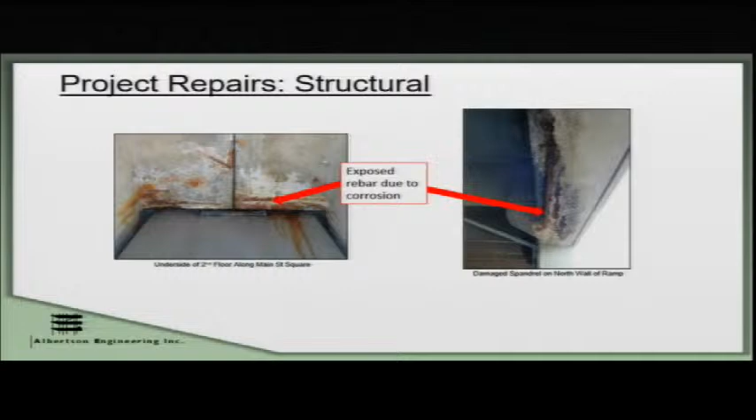The right-hand picture is an image taken, again, below the second floor along the north ramp line, where we have a precast edge element that has experienced more significant deterioration where moisture has penetrated into that concrete, has corroded that internal reinforcement, caused it to expand, and is now beginning to spall or explode that cover concrete away, revealing the reinforcement.

If you've ever been in the garage and you've heard a car driving and you hear a loud kerchunk, what you are hearing is them driving over what's shown on the left-hand side, which we're calling sandwich plate joints, where during original construction, the double T's were not fabricated quite correctly. There were supposed to be connectors along their joint lines that were meant to mitigate their flange tips from moving relative to one another as a car drove over them. Those connectors were not installed appropriately.

As a previous repair, these sandwich plates were meant to be installed top and bottom to mitigate that movement. They're not doing any of that. They're along for the ride. And so that noise is actually those plates being bounced as a vehicle drives. That large differential movement between the flanges is actually tearing up that joint sealant, and as you can see in that picture, we actually have on all of these joints extensive moisture infiltration to the underside of the deck and the double T's where we don't want the moisture to be.

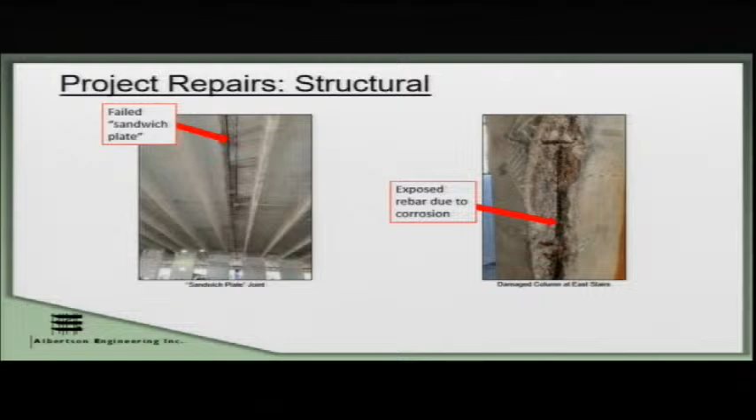The final structural picture, this is actually a column located at the southeast stairs right by the garbage compactor. Again, this is a vertical element that has significant cracking and spalling issues throughout its entire height from second floor down to ground, again, due to moisture infiltration and the resulting corrosion and deterioration from that.

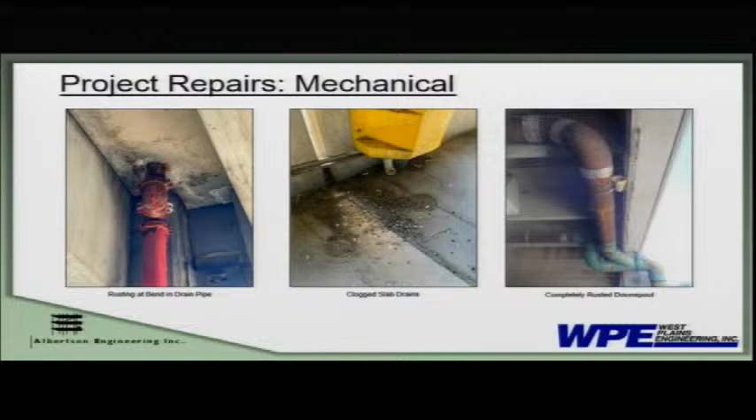As we jump over to mechanical issues, the left and right pictures both show deteriorated vertical drain piping. The entirety of the vertical drain piping and the existing floor drains are to be replaced. Actually, the center picture shows a couple floor drains that weren't sized appropriately in a previous project, and they're now completely clogged. In addition, along the second floor south line on the Main Street Square side, we're adding, I believe, an additional 10 floor drains to help mitigate some of that ponding that happens on a regular basis in the low spots of the deck.

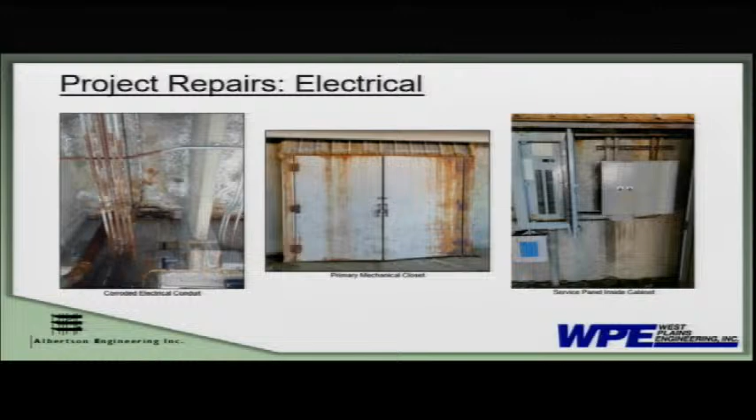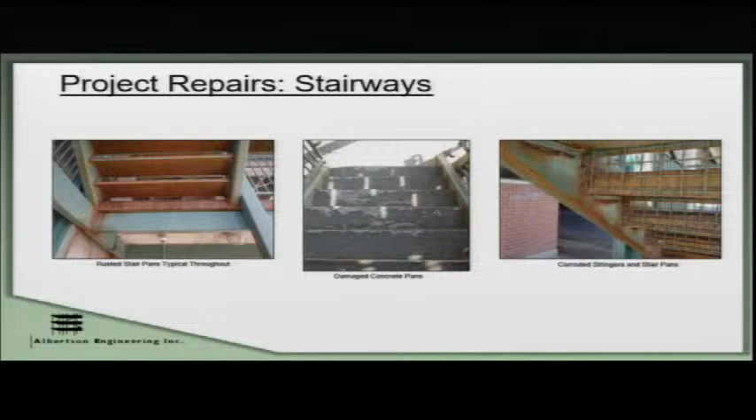I don't want to spend a lot of time on the stairs, these next two slides, because you all walk these probably every day. These stairs have a variety of corrosion deterioration issues, from general surface corrosion, rust pitting, where moisture actually gets behind the paint and the paint actually holds the moisture up to the steel, causing more localized extensive damage than if it were just bare steel open to the air. The stair treads themselves that are concrete are in poor shape. That's a safe word to use. They have very uneven, unequal walking surfaces.

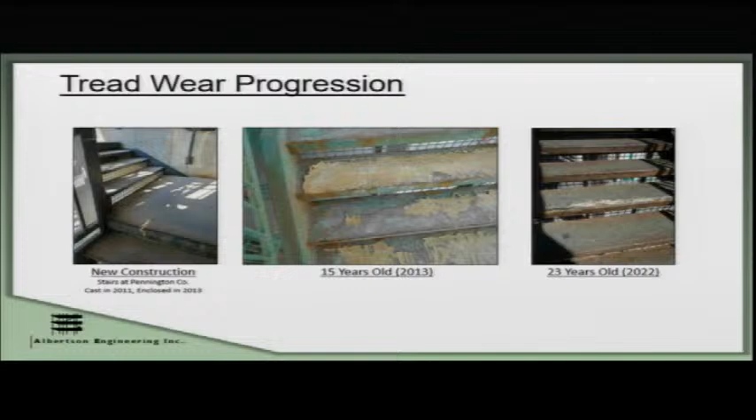So in addition to the renovation items that we already highlighted, we are also proposing that the southwest and southeast stairways be enclosed. The primary reasons for this is we want to mitigate that potential for slips, trips, and falls, and to mitigate that potential for snow and ice buildup on the stairs. It is going to provide better protection not just for the users that have to navigate the stairs on a regular basis, but also for the structure itself.

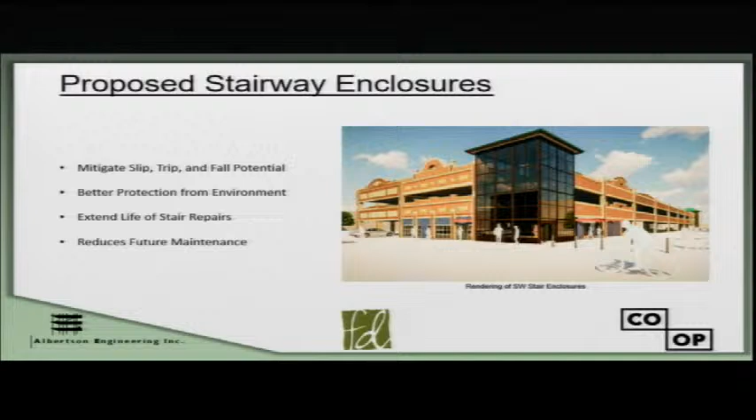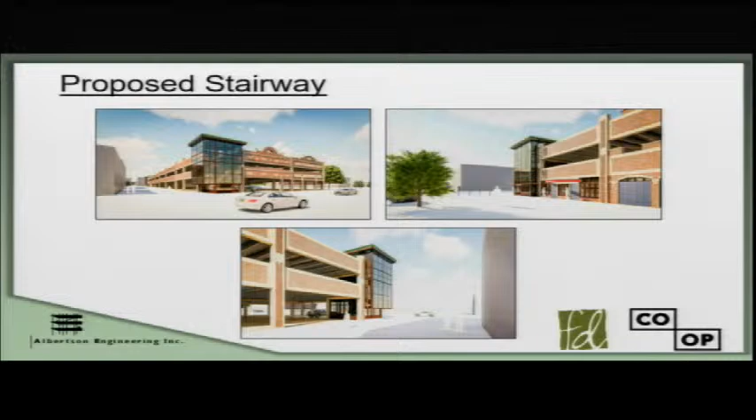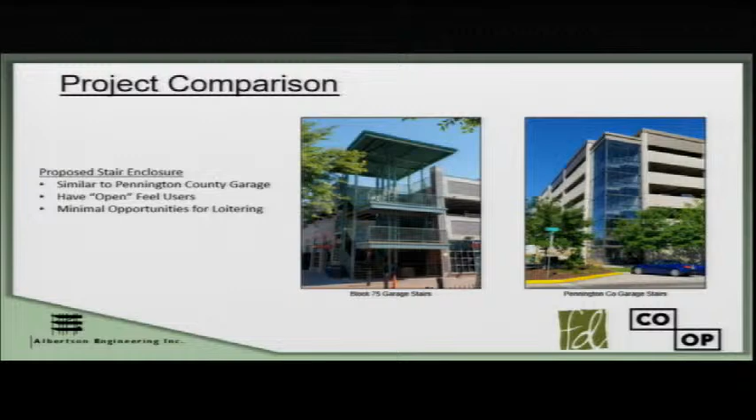For those of you who use the garage at night, here's a comparison of what we're looking to achieve as part of this future project. We will be renovating the lights in the Block 75 garage to go to whiter, brighter LED fixtures. And as you can see, the Pennington County garage stair feels very open even at night. If you do happen to go over there, there's very few places someone could loiter or hide in that stair that you wouldn't be able to visually see as someone walking up or approaching the garage.

So this project is an extensive top-down maintenance renovation project of the entire garage. And it's of such extent and size that there is no way that a contractor is effectively going to be able to tackle it all at once in a short period of time. In our construction documents, we have provided phasing, and we've tried to chunk out the work in manageable enough pieces for the contractor to address in a timely fashion. In our drawings, phase one, and I say phase one simply because we wanted to get that up front and center before the contractors, is going to be the phase that the garage will need to be shut down. At this point, we have proposed for it to be shut down for 8 weeks.

With the proposed schedule shift, it is likely that this will not be the first phase that they do. If it were me and I got the project, I would probably start that shutdown somewhere between March and April. But the primary reason we are shutting down the garage is there's some extensive concrete work that has to be done up on 3rd floor that actually requires shoring on both the ramp side and the south side all the way down to ground level. And the contractor is going to tear relatively large holes into the concrete deck, about 20 feet long, 8 feet wide in 2 spots, so unless you feel like trying to jump a big hole with your car, to better manage that safety, we are recommending that the garage be entirely shut down.

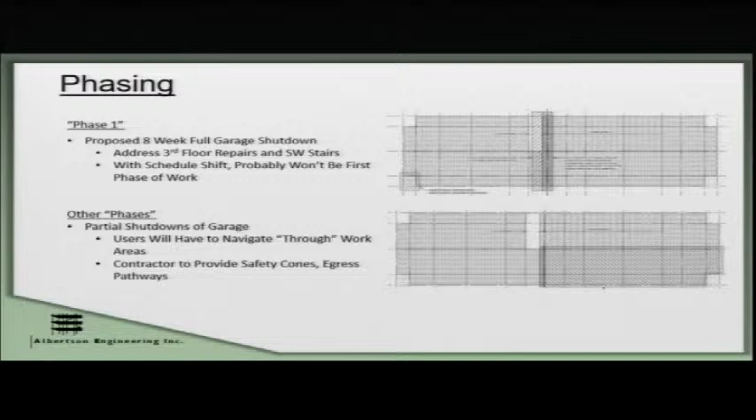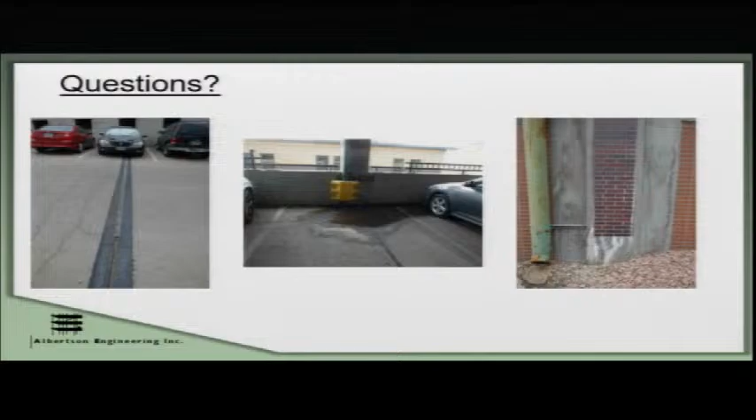I know that was a lot of information, and I believe, as Rod said, this is being recorded, so if you have questions, feel free to ask them, either of me or the city representatives that are here.

Thank you, Stefan. Again, my name is Vicki Fisher. I'm the Director of Community Development. I think that it was important for us to see the state of the current structure and knowing that we need to make repairs because this structure is important to us as a community.

We recognize that as someone who has a business or someone who lives in this area, someone who has customers, this parking structure is essential for us to all be successful. We want to partner with you. We want to make sure that any inconvenience you feel is mitigated to the greatest degree possible.

And so knowing the scope of the work that needs to be done, it helped me when Rod came to me to say, okay, this is what we need and this is the length of time. Having this additional information was very important. One of the things that Stefan pointed out too is showing the life of the stairwells. When it was originally built, when it was improved in 2013, and then the deteriorated state that it is today.

Similar to the enclosure on the stairwells, a huge dollar price on these repairs is providing a sealant. And again, not being in the construction world, the best way that they could explain it to me is, for those of us who are homeowners, you go out and you stain your deck. If you don't put a sealant on it, you're just restaining it and restaining it. But with a sealant, you get a little more life behind that. And so this sealant will hopefully minimize future repairs and extend the length of time before we would be faced with having to do such a major renovation again.

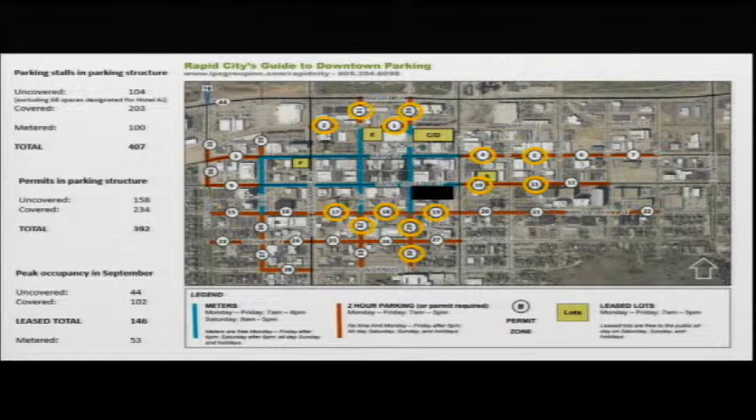So if there are not, am I going to be down on that furthest southern one and having to walk all that way? I have to park there, I have to walk all that way, but then I get a ticket. How am I going to be notified as to where I need to be, when I need to be, and when I cannot be there? And then who gets the priorities when the garage is a partial opening and partial closings?

I'll address one of your questions, and that's regarding the stairwell itself, the enclosure, and I would say a better way to describe it is a partial enclosure. It will not be enclosed on the interior side, just on the exterior sides, and that's to cut down wind, cut down weather coming into the structure. But you're still going to have breeze through there. It's going to be, let's just say, naturally ventilated.

I guess some of your other concerns, operational concerns, to a certain extent, I think those concerns are there now, and I think those are some things that are going to take some more thought about how we address them. But I'll leave it at that. So we are aware when body fluids are left behind in the parking structure, because Anna and her team has to go clean it up.

What we're hopeful for, and what we've seen in other communities as well, even though this is just a partial enclosure, it will be better lit. It is completely transparent. We will put up loitering system security if we need to. In addition, as we're looking at hiring an independent private company for patrol, we think that we're actually going to improve the safety of the parking structure from where it stands today.